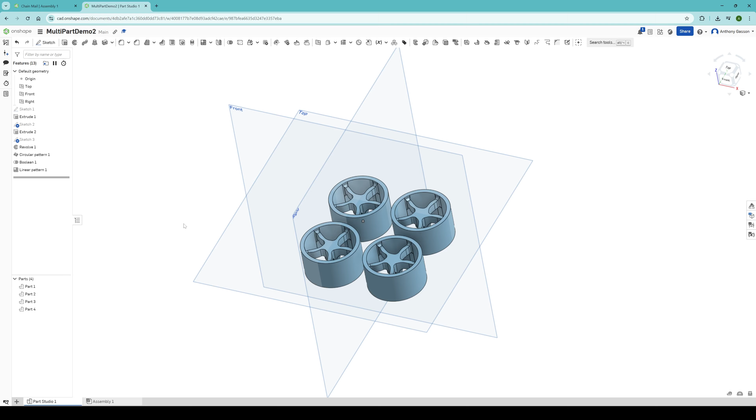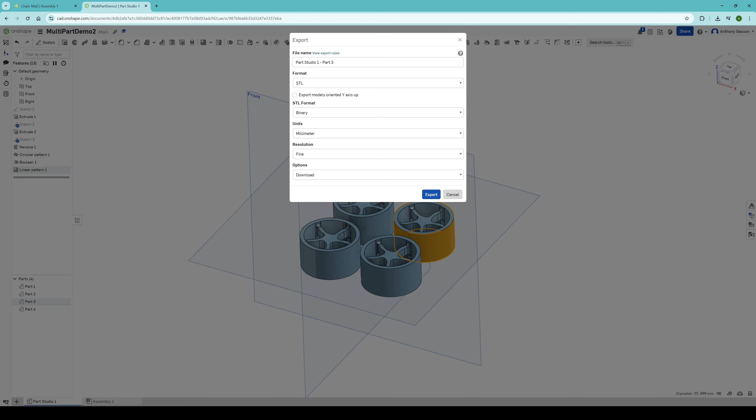The first scenario is I've got 4 identical items on the project. These are some wheels for a remote control car. Basically, 1 wheel was drawn, then the copies of that wheel were created using the linear pattern tool. If you right click on any of those parts and click export, it's only going to export the part which you selected.

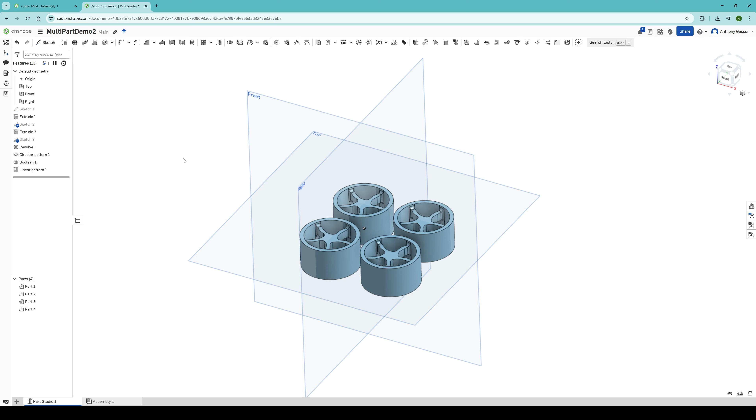You can see up here under file name, it's actually appended part 3 to the file name there. In this case, I'm actually preparing all 4 of these wheels to be printed as 1 unit. There are 2 ways I can export all of these together. The first way is with nothing else selected, clicking with the left mouse button, then dragging a box over all of those parts. You'll see there that has collected all of those parts over on the left there. I should then be able to right click and hit the export button. You'll see here I now have some additional options which weren't there before on the export tab. One of those being export unique parts as individual files. I want to leave that unchecked, and I'm just going to give this the file name wheels assembly.

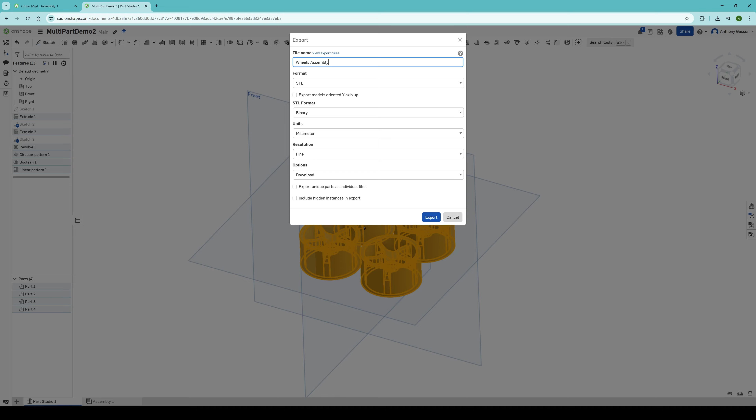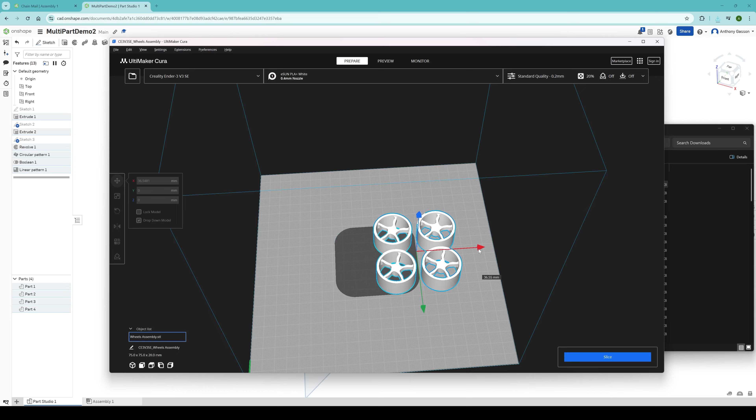Click to export. If I open up that folder, drag those into Cura, you'll see all of those wheels have come into Cura as a single STL file. If I click on any one of those and try and manipulate it, Cura handles those as if they are one piece. This means that if you wanted to adjust the spacing between these wheels later on in Cura, you would be unable to do it because the file has been exported as one complete part. It's going to maintain all of its dimensions, including the spacing between each part, as well as being able to drag and drop a box to collect all of the parts.

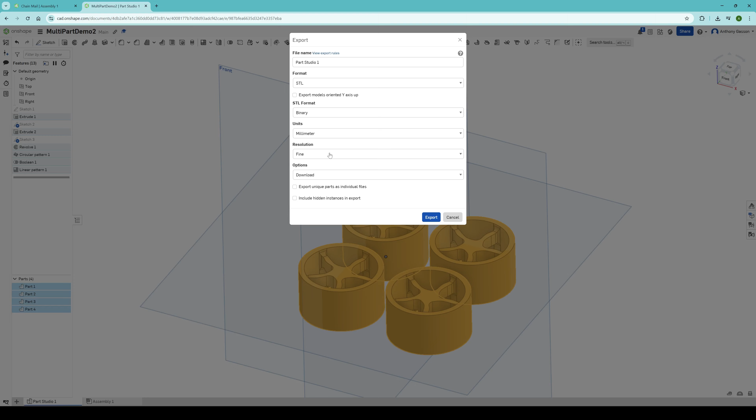You can also click and hold the shift key down in the parts space over here and select all of those parts. Right click on that selection and click export, and that will also collect all of those parts and export them as one. A second situation you might find yourself in is where you have an assembly.

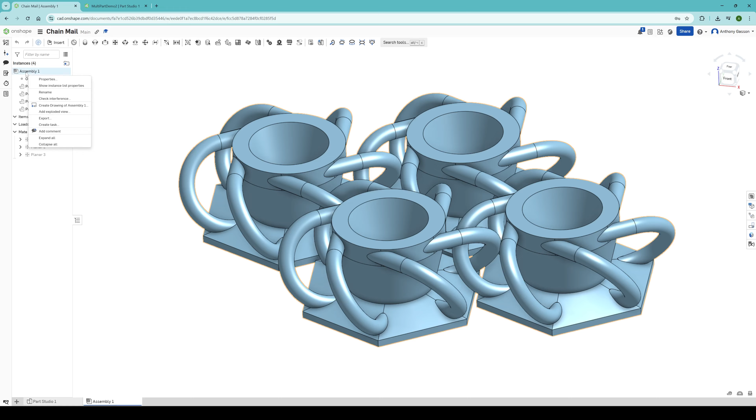If you've created an assembly in Onshape, you will have an additional tab down here. To be able to export an assembly, you want to move your mouse over here under where it says instances, right click on assembly, and then click export. You'll see here once again you have the option to export unique parts as individual files. Once again, I would like to leave this unticked. A quick rename of the file, export and download.

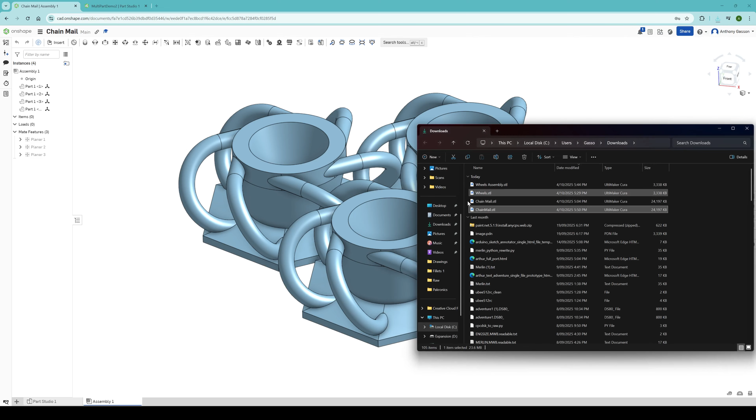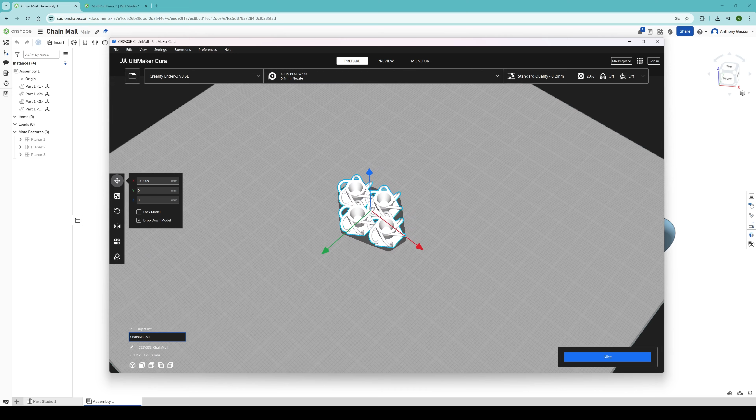I'll drag this into Cura and show you how that behaves. You can see there that similar to the first scenario, that STL file has come into Cura as one piece. Any manipulations made in the slicer software are made to the entire assembly. There is no way to change the individual spacing of each part now that it is one single STL file.

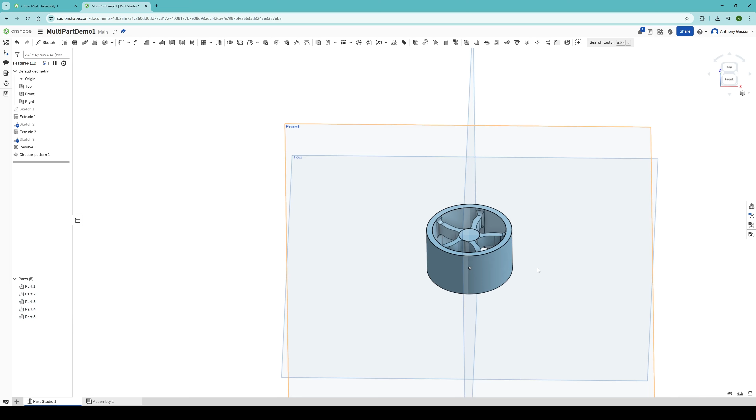The last scenario that I'm going to share with you: perhaps you have multiple parts even though you don't intend to, like I do in this drawing. This is a previous copy of the individual wheel that appeared earlier. As you can see, this part actually consists of 5 different parts. That's because of the way the circular pattern here has been completed.

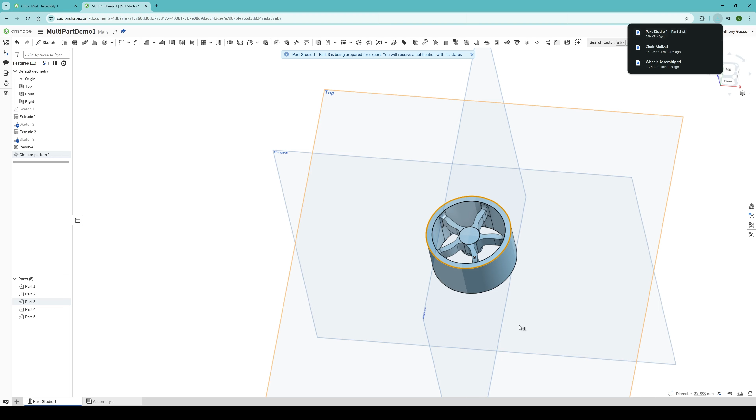If I were to right-click on this part here in the window and click export, you'll see there it's appended part 3 to that part studio name. I'm just going to export this and open it in Cura. As you can see there, Onshape has exported the part with 1 spoke. This is not how I want to 3D print my wheel. The wheel has 5 spokes and I want to collect all of them.

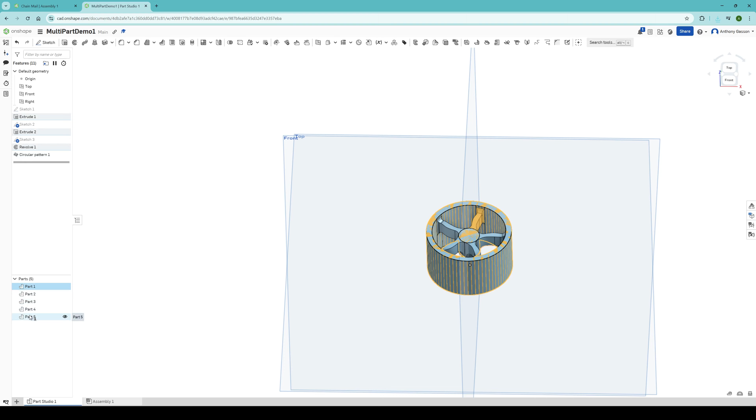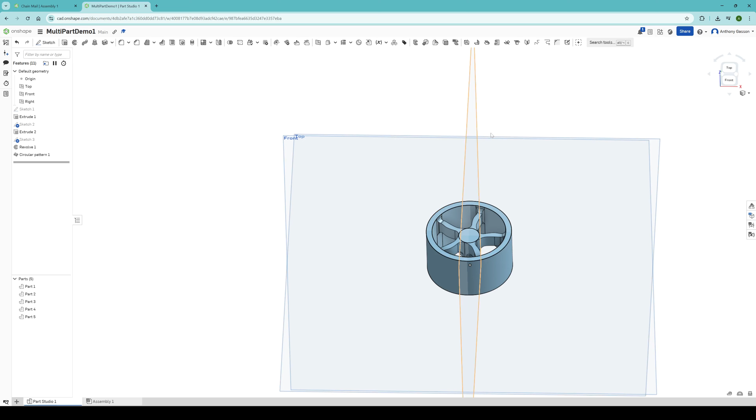Now, the simple way is, of course, to use the Shift and click all of those parts there in that left-hand menu, or to drag a box over all of those, right-click, and then you can export. But for simplicity, if you wanted to make your life easier, there's another step you can take with your modeling to make this one piece. That will make it much easier for you, or if you're planning to send this to somebody else to 3D print for you, it will make it much easier for another person to understand what you're trying to achieve.

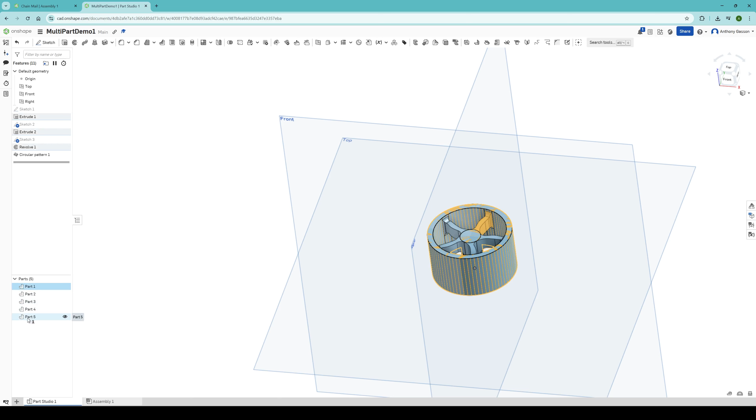How can you convert all of these into one part and export them all at once? Simply click on all of those parts just like we did before. Then if you come up here and choose the Boolean operation, you can now perform a union on all of those. Click the tick and you'll see there that the wheel now only consists of 1 part, which you can of course right click and export. There it is in my slicer software. It's all one piece. That's it.

3 scenarios where you might have multiple parts in an Onshape document. Do you want to export them to STL files for 3D printing? Here's how you can handle each of those 3 scenarios.